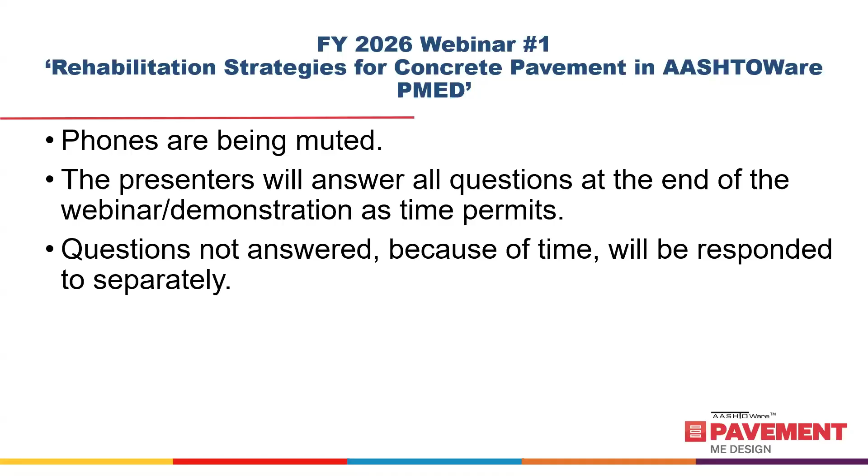Before we start the webinar itself, I do want to mention the prerequisite, which is having some prior experience with using the Pavement ME Design software, whether it's the desktop or the web version, for new concrete pavement design. There's a lot of things we will not be discussing because the assumption is that you have some familiarity with it, such as the traffic module, the climate module, and most of the material input data as well. The webinar will highlight areas where there are some differences as far as the user inputs go. But it's not that you won't get anything out of this if you don't have that experience, but it would help a lot to use that as the jumping off point for what we're going to talk about.

And with that, we'll talk about the learning outcomes. First, we're going to list the different rehabilitation options that are available for both jointed plain concrete and continuously reinforced concrete pavement.

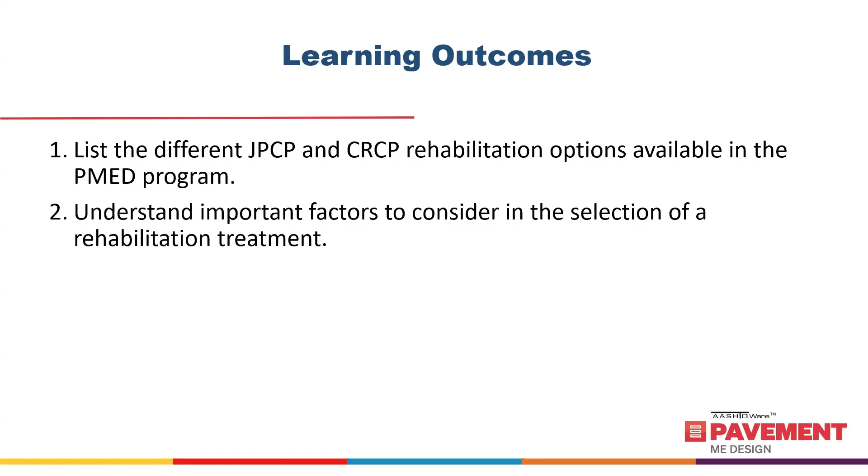We'll understand what factors go into considering the selection of the appropriate rehabilitation treatment, which is going to be tied back to the existing condition of your concrete pavement, essentially. And then we will talk about any differences in the material or design property inputs for rehabilitation versus new pavement design.

Sprinkled throughout the presentation, I'll bring up jointed reinforced concrete pavements, how those can be handled or maybe not handled with certain of the models. The reason it's good to mention this is because there's still a number of states that have a legacy of jointed reinforced concrete pavements, and the performance models were never calibrated specifically for jointed reinforced. It's always been either jointed plain or continuously reinforced concrete pavement.

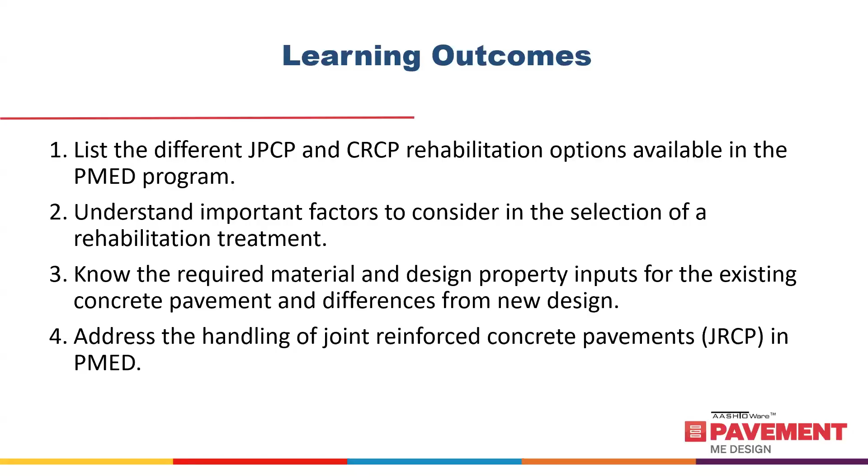However, when you're rehabilitating, especially if you're covering it, there are some ways that you can incorporate JRCP into the Pavement ME Design.

And the specific topics: we will go over the condition assessment, things that can be looked at for the current condition of a concrete pavement, and gauging the severity level. And then we'll get into basically the 5 different categories of models that are in Pavement ME Design.

Jointed plain restoration, which is only for jointed plain concrete - there's no CRCP restoration option. Bonded concrete overlays on either jointed plain or continuously reinforced. Asphalt overlays on either of the 2 pavement types. Unbonded concrete overlays on jointed plain or continuously reinforced, and asphalt overlay on fractured jointed plain or continuously reinforced. Several of these, 2 or 3 of these, have subtypes that we'll discuss, so there are more possibilities to select for some of these categories.

And finally, we'll summarize with some of the primary takeaways of the webinar. As a reference, the information provided can be tied back to certain chapters in the AASHTO MEPDG Manual of Practice. Specifically, Chapter 9 covers the pavement evaluation for rehabilitation design, which would be your condition assessment of the pavement. Chapter 12.2 covers rehabilitation design with asphalt overlays, and Chapter 12.3 covers rehabilitation design with concrete overlays.

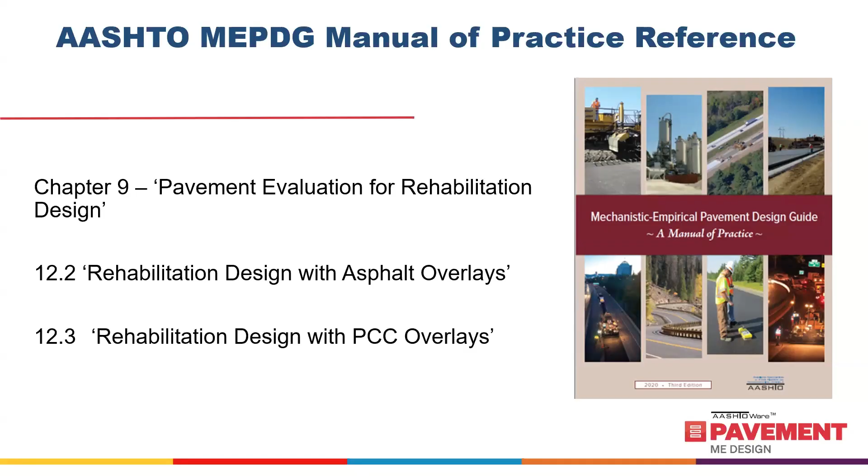Okay, starting with the first item, condition assessment of rigid pavement.

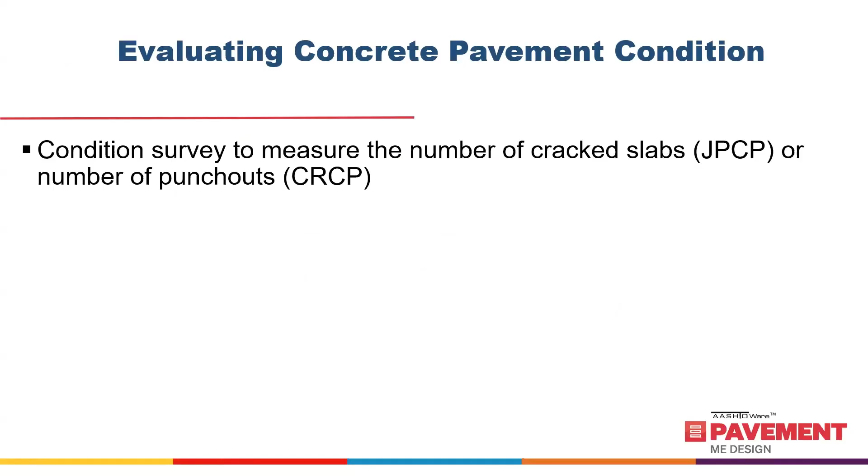The things you can do: one is a condition survey to measure the number of cracked slabs in jointed plain concrete pavement, or the number of punch-outs per mile for CRCP.

You can back-calculate information for jointed plain concrete pavement. If you can back-calculate the concrete elastic modulus, then use the correction factor to get the static value, which is what you would input in Pavement ME Design.

You could also back-calculate the resilient modulus values of the lower, unbound layers, or you can just go straight to calculating what the dynamic K value is. The K value is used for the foundation support engineering property in the analyses. You'll have an option to do a conversion from the lower estimated resilient moduli to get the K value, or you can input it directly if you wish.

Load transfer efficiency of transverse joints and cracks is important because it will be used as a design property in helping to estimate the amount of reflective cracking that's going to occur through asphalt overlays.

Void detection at corners is primarily to figure out if you have to do repairs—you're going to have to restore the concrete pavement to some extent in order to do some of these rehabilitation treatments. So you're going to have some type of minimum performance level. The FWD does a pretty good job of this; there's a method for estimating voids using the relationship between the load and deflection.

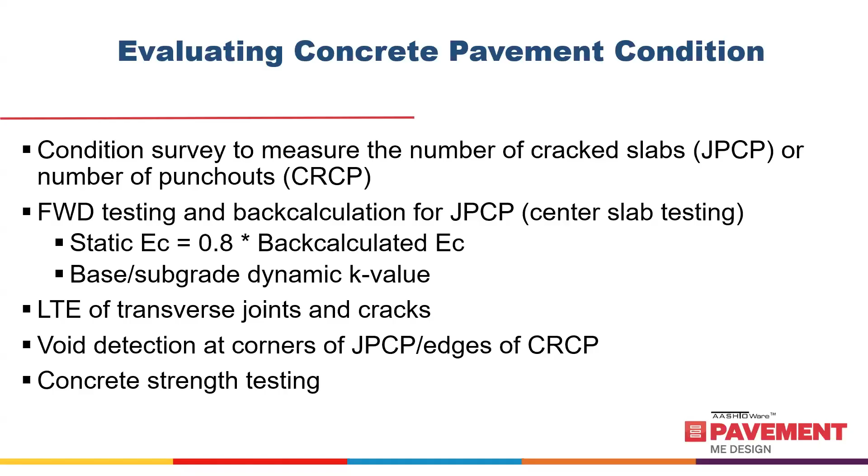There is a table in the manual of practice that helps you gauge the serviceability level of the pavement you're evaluating. It covers jointed plain and CRCP, but also has a few entries for jointed reinforced concrete pavement. So if you're covering up JRCP pavement, you can use this criteria to help determine what some of the design property inputs are going to be.

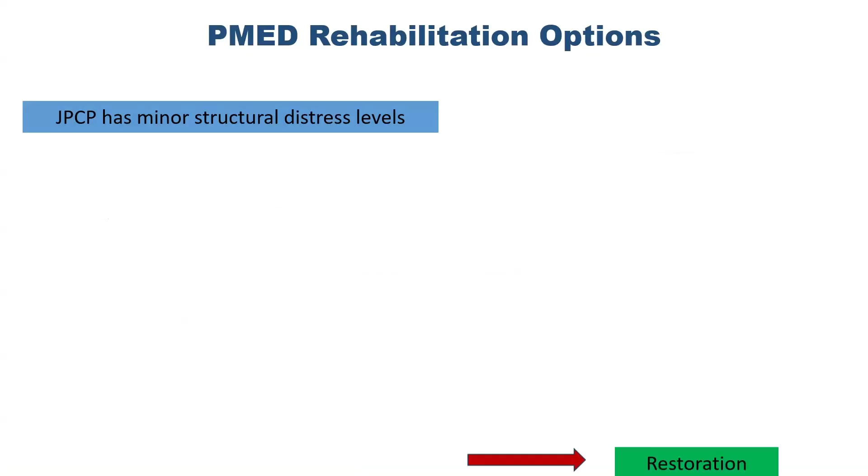So what are our options? If the jointed plain concrete pavement has minor structural distress levels, that can be a good candidate for restoration using the restoration module. If you have minor structural distress levels but may need additional structure, a bonded concrete overlay is a possibility—well, maybe not a strong possibility. We'll get into that when we cover this.

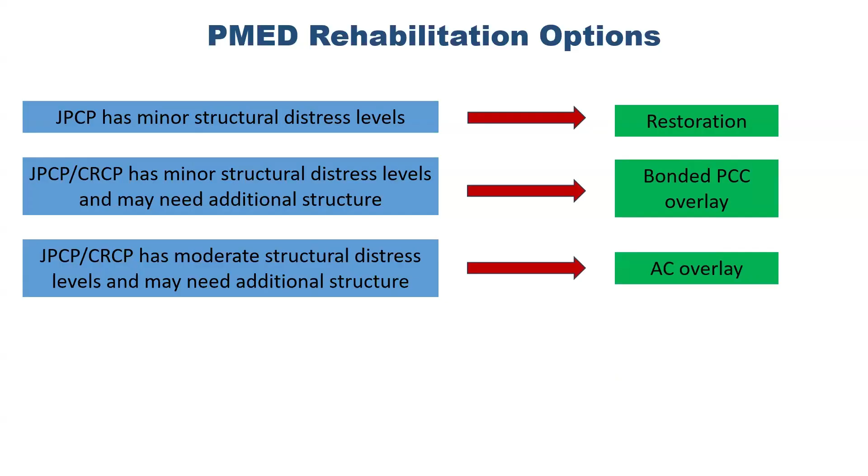If it has moderate structural distress and may need additional structure, that might be the sweet spot for considering an asphalt overlay. If you have moderate to major structural distress levels in either type, at that point you may have to go to an unbonded concrete overlay.

And finally, if you just have major structural distress levels that would cause you to distrust any of the overlay options, then you can look at fracturing the concrete and placing an asphalt overlay on it. So these 5 rehabilitation treatments are all represented in performance models in the Pavement ME Design program.

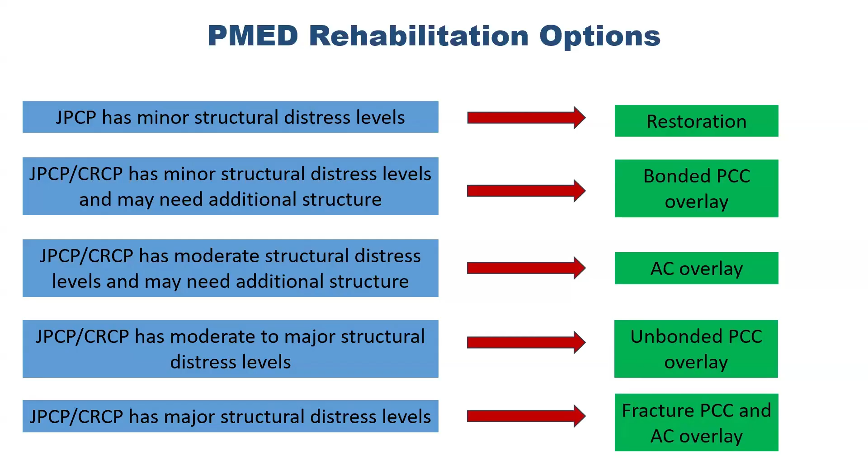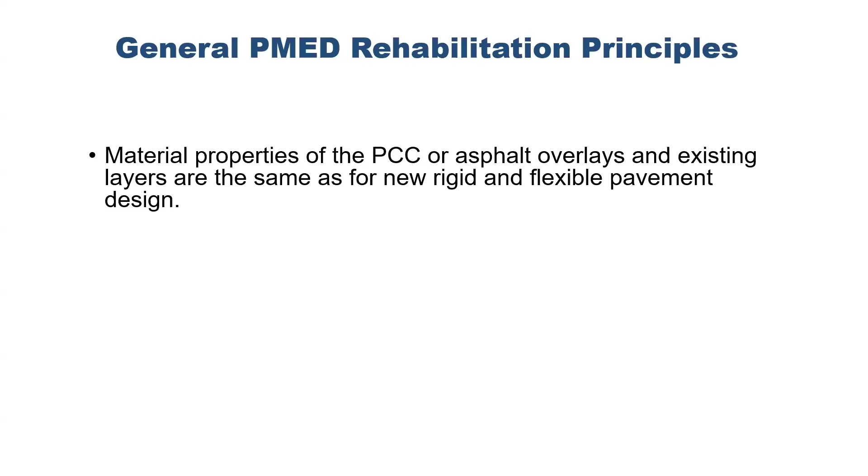So some guiding principles cover pretty much all the types of rehabilitation strategies we have here. Keep these in mind: the material properties of the concrete or asphalt overlays and existing layers are the same as for new rigid and flexible pavement design. So we're not really changing anything there.

The models and transfer functions are also the same as for new pavement design, except that if you are placing an asphalt overlay on the concrete pavement, then you're also going to include the reflection cracking model as well in the estimate of primarily the total transverse cracking.

Okay, let's get into some of the specific treatments here. JPCP restoration—this is just showing you a screenshot when you initiate the project. You're going to be selecting the design type. From the drop-down menu, you can select restoration. For pavement type, there's only one to select, which is jointed plain concrete restoration. As I said, that option isn't there for CRCP.

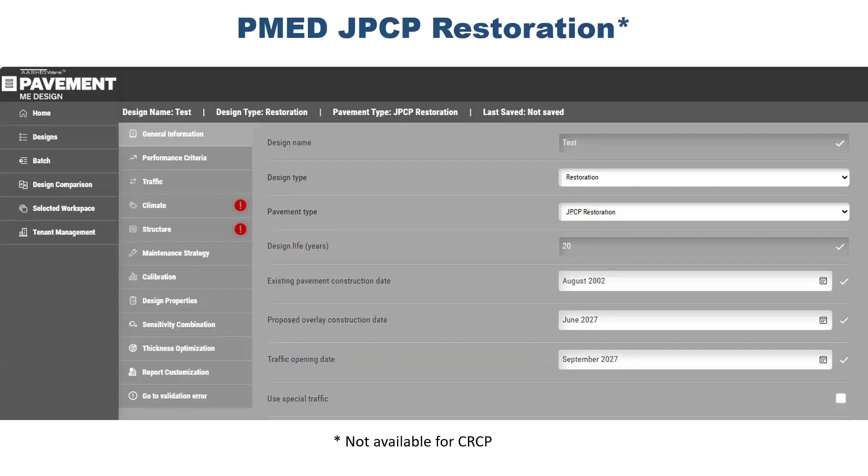So what kind of pavement would we select for doing restoration? No significant cracking. Obviously, you can address cracking through full depth repair as much as you want, but from a cost effectiveness standpoint, it's probably not a wise choice.

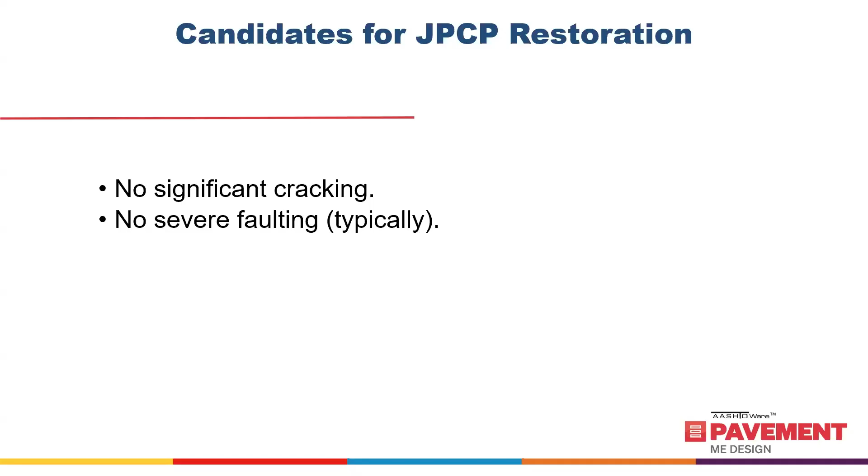At that point, you'd be better off doing one of the more heavier duty rehabilitation treatments. No severe faulting typically. I say typically because you could have a situation where the original concrete pavement did not have dowel bars, and so you might have had somewhat significant faulting occurring because of that. However, the subgrade itself is still in pretty stable condition. So really, if you do dowel bar retrofitting and then diamond grind the surface, that could still be a good candidate for restoration if you don't think loss of subgrade support is going to haunt you in the future.

So that's why I say generally severe faulting would be an issue, but you have to evaluate the foundation condition. No significant durability problems—in other words, no concrete cancer, D-cracking, alkali silica reaction, some of the other nasty things that can happen to concrete. Once it starts, it's going to continue. And really, at that point, if you want to retain the concrete pavement in some manner in the structure, covering it up is probably the best thing you can do because that will slow down or inhibit the infiltration of chlorides and other nasty things that get into it through water or precipitation.

And you can slow down the deterioration in the concrete pavement and get more life out of it. No significant subgrade pumping—I kind of alluded to this with the cracking issue. So if you have pumping going on, you have to do something, either through a combination of retrofitting, undersealing, slab replacement, maybe even undercutting and putting some select fill in areas. But that definitely is not a restoration candidate if that's happening.

And as far as JRCPs go, no, you cannot do restoration modeling in Pavement ME Design with a jointed reinforced concrete pavement, because it's not being buried where its properties become less significant. You're still stuck with that as your final product, and the model simply wasn't calibrated for the longer joint spacing and mesh reinforcement.

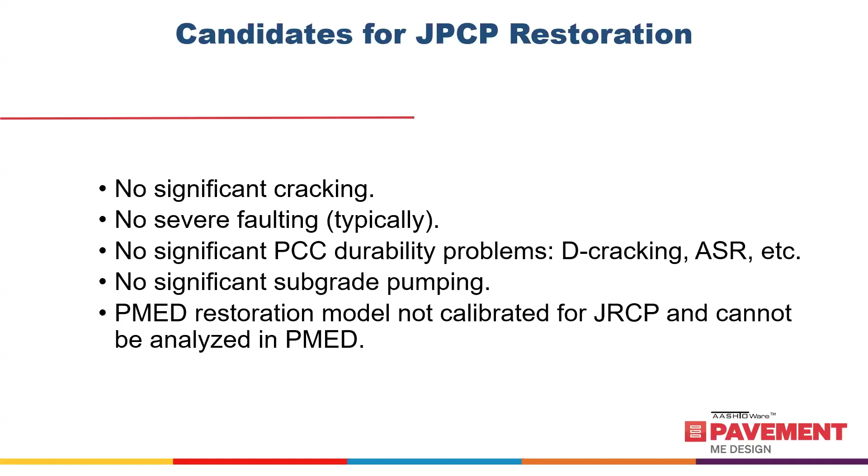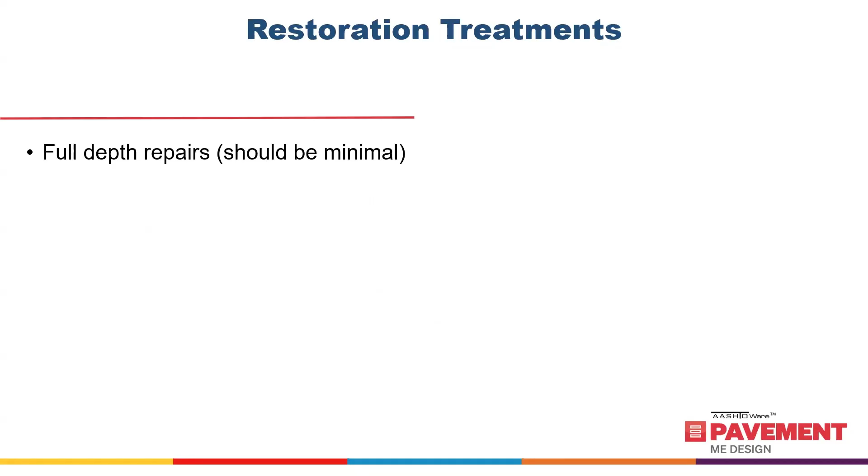So as far as treatments, what would you do prior to running the design? Full depth repairs. Again, if you want to be cost effective, if you run over some theoretical percentage of full depth repairs that are required, at that point you should be looking at some other rehabilitation strategy.

And partial depth repairs. Now there may be more of these. They're in spot locations generally, and if whoever's doing the partial depth repairs does it according to proper procedure, which is another topic in itself, they should be long-term fixes. So they're a good solution when done right.

Dowel bar retrofitting, especially if you don't have dowel bars at the joints right now, should always be strongly encouraged. Cross stitching—this is a lesser known treatment, but it's used in situations where you have some uncontrolled longitudinal cracks. They might not have opened up yet, but the potential is there in the future. And if it opens up a little bit and you have a little bit of settlement, you could have faulting longitudinally. So cross stitching isn't really meant to solve loss of load transfer so much as to keep slabs together so they don't walk away.

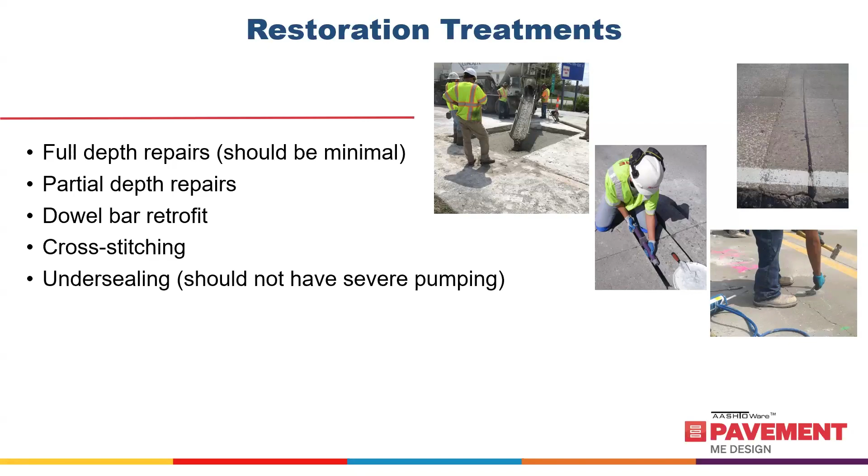But keeping the crack tight provides you aggregate interlock, so it does help with load transfer as well. And undersealing—again, it shouldn't be used to solve severe pumping problems. It'll definitely help, but it's more so when you detect a void through FWD testing, just to try to prevent that from being a problem in the future.

And finally, diamond grinding, which is kind of icing on the cake. This is where you really hit the reset button. You've done all your other restoration treatments, and finally you grind the surface, and you're back at, hopefully, at least whatever the IRI was at the date of construction, if not better than that. And generally it should be better than what it was constructed at.

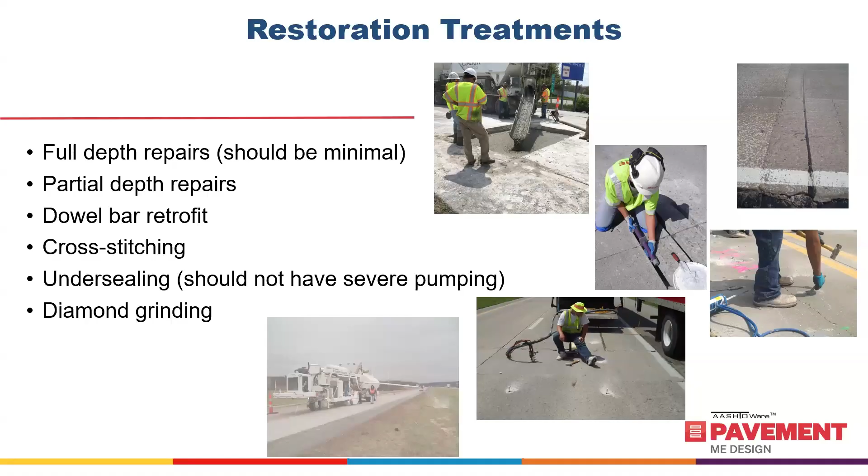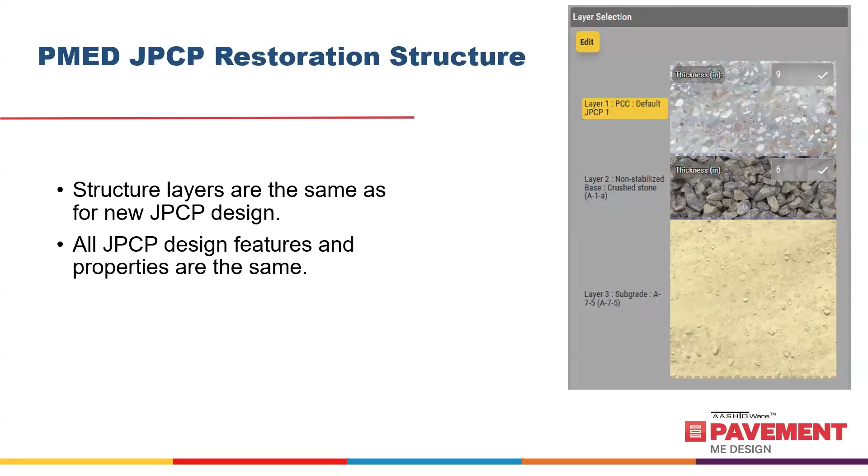As far as the structure, when you do the layer selection, it's the same as a new pavement. You're not adding any layers to it or any overlay. So it's your concrete pavement—all the design features and properties are the same. The performance criteria is the same as for a new jointed plain concrete pavement.

Now your IRI that you're setting, the initial IRI, again take into account the restoration treatments you did to it. So if you do a bunch of patching and you don't grind it, it's probably going to be a little worse ride-wise, unless the contractor did an excellent job of finishing the repairs. But generally that's kind of hard to do. You're better off, again, grinding the final surface. And then here you would estimate whatever that number is going to be as your initial IRI for performance criteria.

Now, the elastic modulus of the existing slab must be compatible with flexural strength. What that really means is the relationship between modulus and flexural strength should be kind of in lockstep along the maturity curve you'd normally see for both properties. The problem is if your flexural strength is too high relative to elastic modulus, your fatigue cracking could go to almost nothing. The reverse is if your modulus is too high with respect to the modulus of rupture, you could have a much higher quantity of cracking than should actually occur.

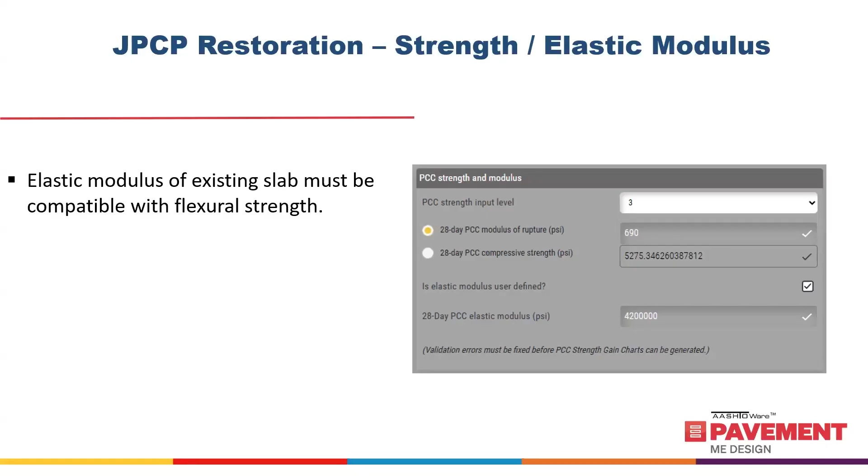And if you are back calculating, as I mentioned, you multiply the dynamic value by 0.8 to convert to a static value for elastic modulus of the concrete. Then you backcast that static value to the 28-day elastic modulus, so it's compatible with whatever your estimate of the 28-day flexural strength is.

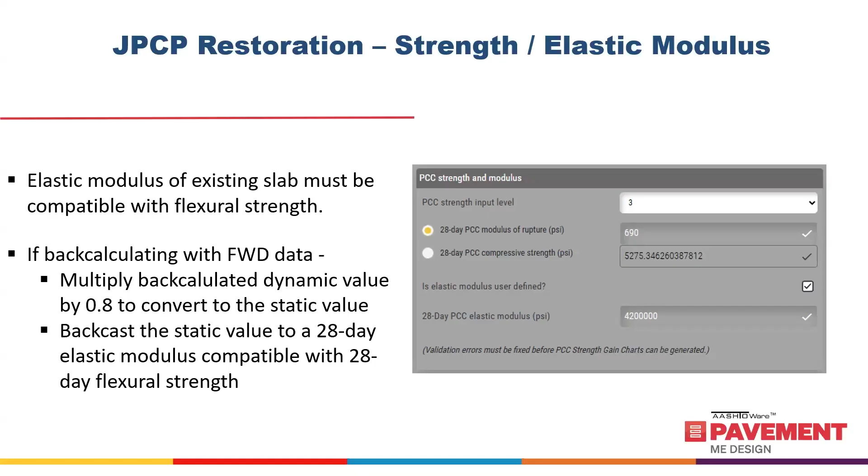Now, for the lower levels, the unbound layers below the concrete pavement, a couple things you can do. One is if you are back calculating the elastic moduli of each layer and input those, you can let the program estimate the dynamic modulus of subgrade reaction. If you don't, you could also input it directly, if you've estimated or calculated it from your FWD data, and that overrides whatever resilient modulus data was there for the unbound layers below. So ultimately, the actual engineering property input used in the analysis is the modulus of subgrade reaction, or your K value.

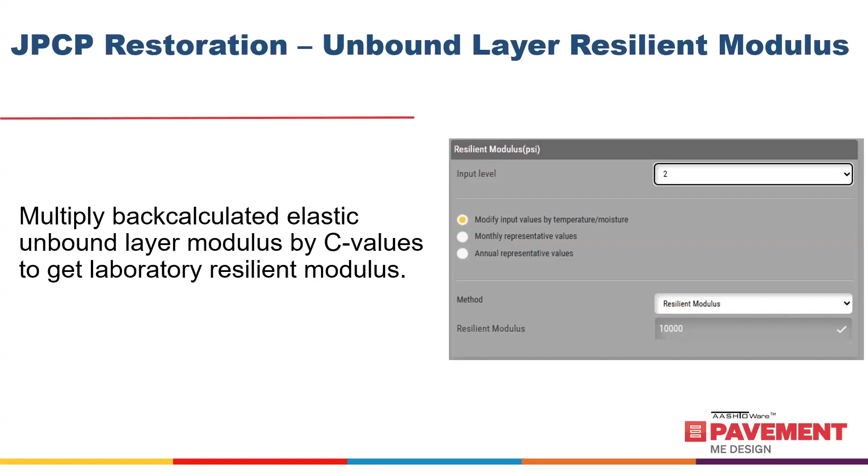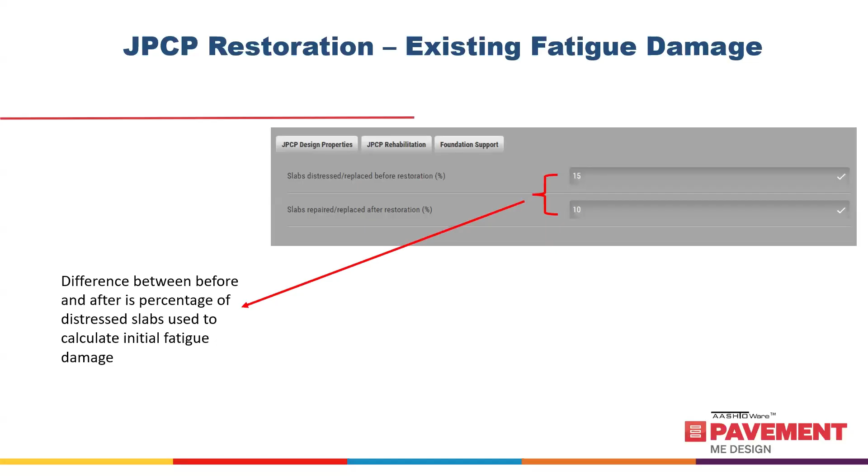I mentioned this already, the fact that if you want to let the Pavement ME Design program calculate the unbound layer modulus of subgrade reaction from the resilient modulus values, just leave the box unchecked. You check it if you're going to input it yourself.

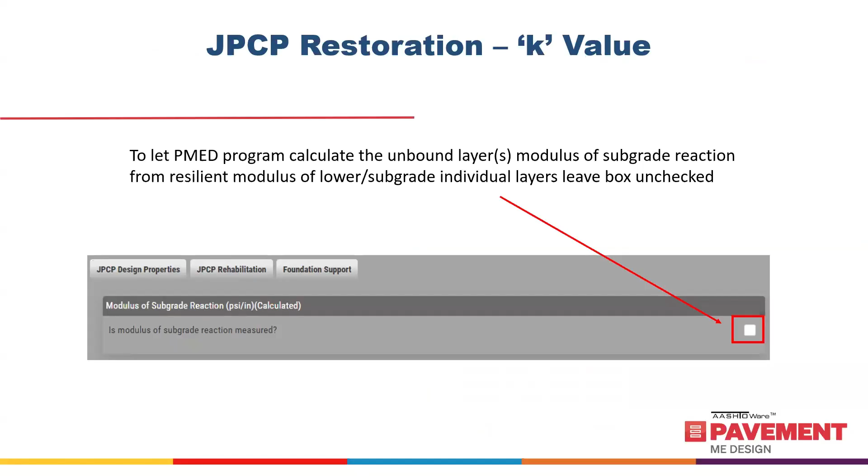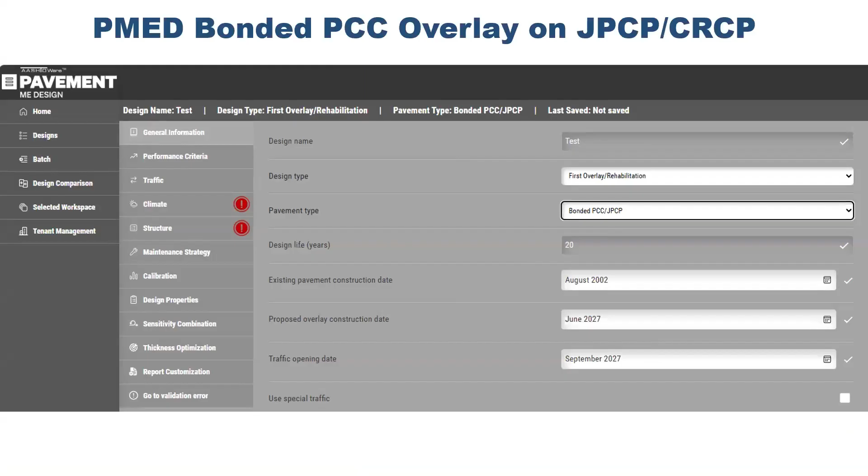Okay, bonded concrete overlays on jointed plain concrete pavement and CRCP. Here again, this is the opening screenshot. In this case, for pavement design type, you're going to select overlay rehabilitation, then pavement type, bonded PCC over JPCP, or there's also bonded PCC over CRCP.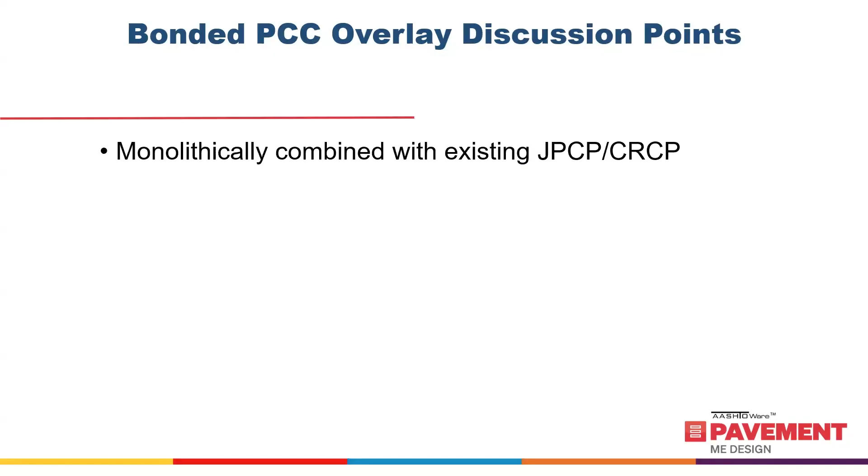Two types. So what's going on? With the bonded concrete overlay, you're essentially creating a monolithic structure between the old and the new concrete. It is the least common pavement treatment, and probably for good reason.

These models were all globally calibrated primarily with long-term pavement performance information, data derived from experiments going back over 30 years ago that were set up to have a statistically representative number of sections to look at. In the case of bonded concrete overlays on concrete, there weren't enough sections. Nationally, there were only 4 sites. So instead of being a full-fledged experiment, it was the SPS7 experiment, basically reduced to a case study situation. So from the beginning, there really weren't a lot of pavements to use for the calibration.

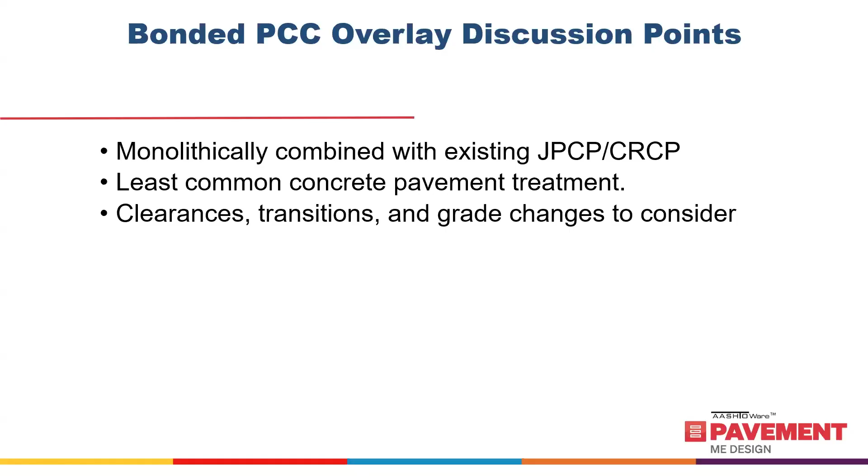Now, why don't people do this? Because there's a lot of difficulty in trying to get it right. As with any overlay strategy involving a grade increase or profile increase, you have to consider clearances at bridges, transitions to bridge approaches, and any grade changes in general as it affects guardrail, slopes, and other roadway features. So always have that in mind.

So this is very high risk, high reward, because there's two things for jointed plain concrete pavement. You have to really prepare the surface well to ensure bond. From personal experience being involved in scoping these projects, and being there in the field as they were being constructed, it takes a lot of quality control to really make sure the amount of sandblasting and shot blasting is appropriate.

It helps to do pull-off tests on the surface just to make sure that good bond is available. This is kind of done all the time on bridge decks, but bridge decks are a smaller area that you can focus attention on more strongly. In the case of a pavement, it's a much broader surface area, and it's difficult to maintain the level of quality control you need to make sure the surface is prepped.

The second issue is joints. Not for CRCP - because the cracks are tight, you can basically just pave right over it. I don't have personal experience with concrete overlays on CRCP, but the theory is that you really shouldn't have uncontrolled cracking resulting from the CRCP cracks.

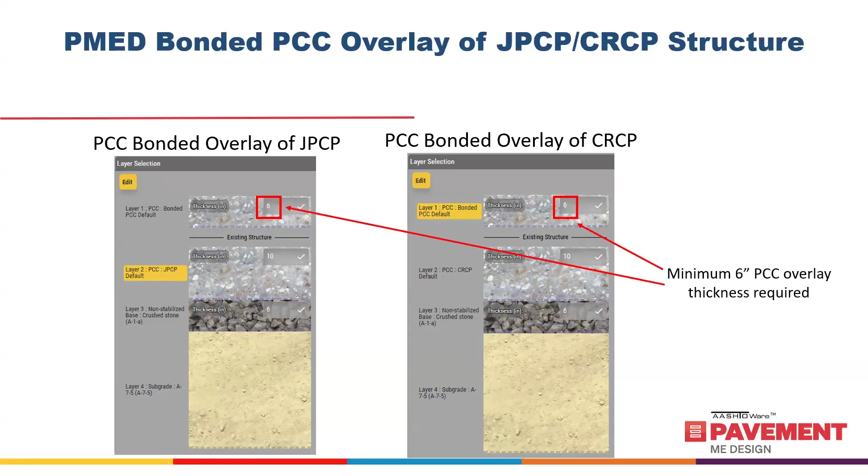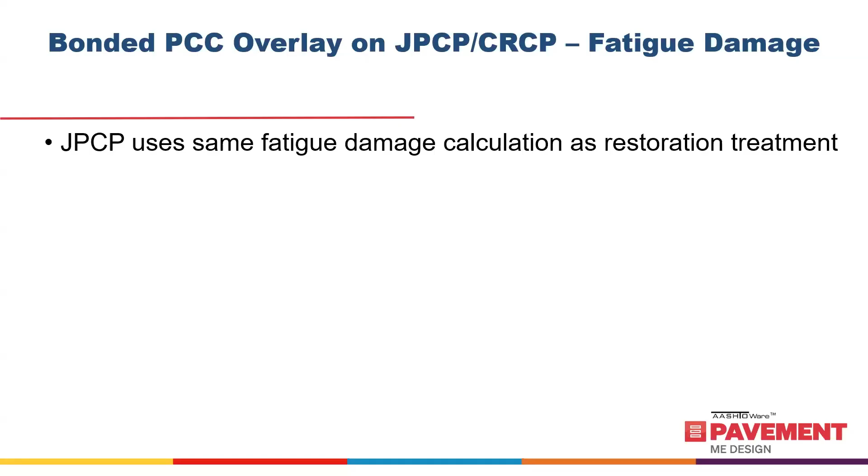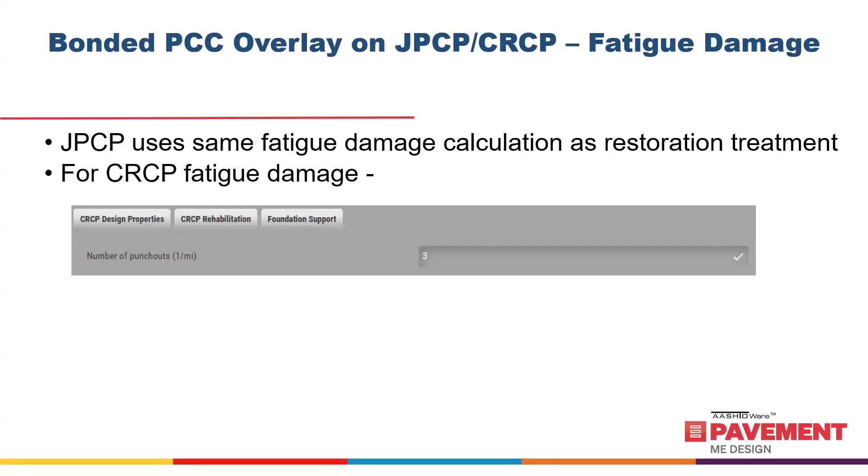As far as the fatigue damage, you're using the same fatigue damage calculations as restoration. For CRCP, you're not doing a difference between before and after slabs - you're basically assessing it from the number of punch outs, and this is actually the correct graph.

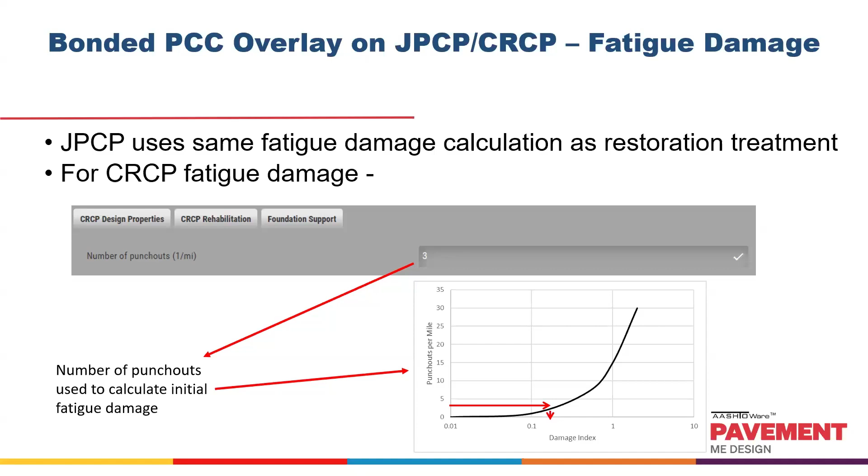I apologize about the previous one, but this is the punch outs per mile versus damage index. In this particular example, we have three punch outs per mile, and you relate that to the damage index, and that's your starting point. So in the analysis, your existing concrete is at that fatigue level, and the fatigue damage that accumulates after that point is basically assessed from that starting point.

And kind of the same thing, your common thread you're going to see is, if you're doing back calculated unbound layers, multiply those by the C values to get the laboratory resilient modulus, or if you just want to input, you can use that then to calculate the modulus of subgrade reaction. But again, you do have the choice of checking that box for that table or for that entry in design properties, and inputting your own K value.

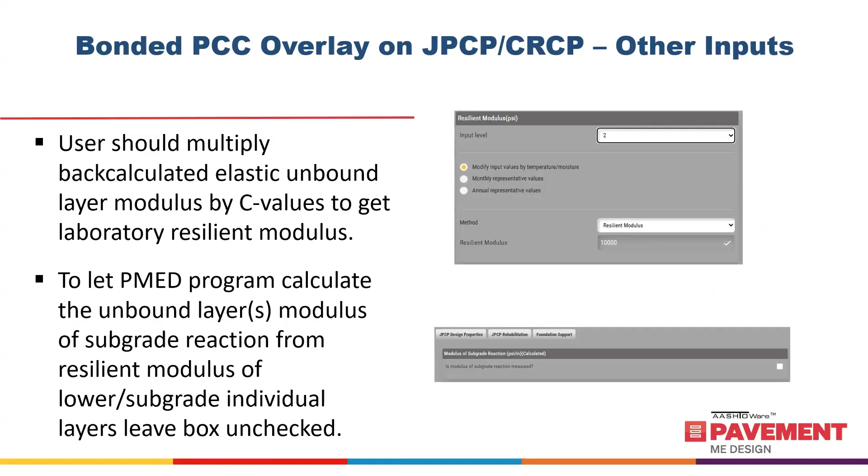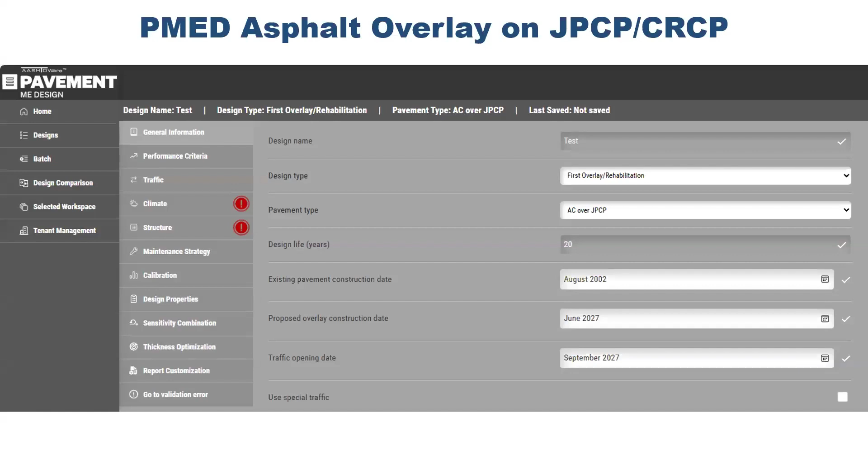Okay, next topic is going to be asphalt overlays on jointed plain concrete and CRCP. Initial screenshot again, you're selecting first overlay rehabilitation, and pavement type is going to be either AC over JPCP or AC over CRCP.

So again, what kind of pavement are we going to be placing asphalt overlays on? It should be in halfway decent shape. Asphalt will cover some issues, but not all. And if you do have some severely cracked slabs, then you should do full depth repairs.

Partial depth repairs aren't as essential. You could obviously fill those with asphalt or patch them with asphalt as you're going over typically, but if you want to restore the surface to its original condition as much as possible before doing an overlay, you can do a partial depth repair with some type of cementitious material.

Dowel bar retrofitting, definitely if you do have load transfer problems, those would reflect it either quickly or maybe delayed to some extent, depending on the thickness of the asphalt overlay. But it's still going to be a problem, and you really want to make sure that you have good load transfer across joints and cracks.

Under sealing, kind of for the same reason. You want to prevent movement of the slabs because those can reflect through fairly quickly.

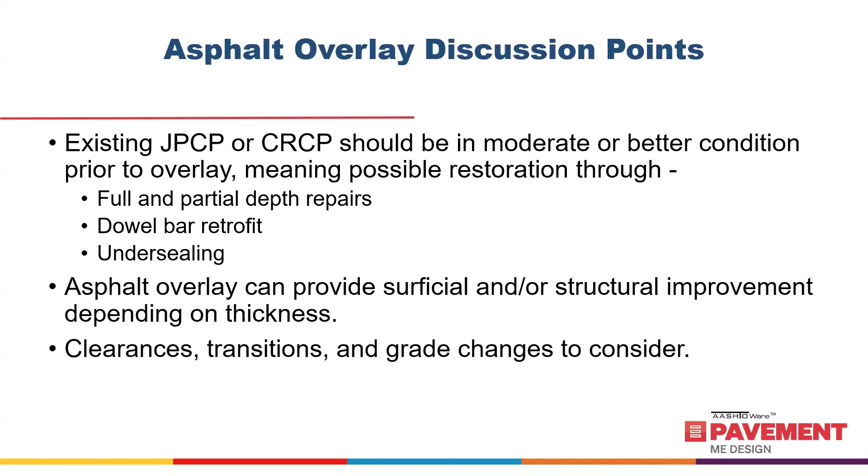And the overlay itself, again, is either going to provide, you can always correct surface conditions. So you can restore ride, you can cover up low to moderate faulting, and depending on the thickness of the overlay, you may actually be adding real structure to the pavement, which would now be a composite pavement structure. As always, take clearances, transitions to bridges or structures, and grade changes into account.

So thin overlays, you are restoring ride, but you're not adding significant structure, and you will get reflective cracking through probably within the first couple of years at joints. And if you do have working cracks, by working cracks I mean a crack that's opened up enough to where the aggregate interlock isn't working anymore.

It's not providing you load transfer, and you really don't have any. If it's plain concrete, you're not going to have any load transfer steel across there either. So sometimes your working cracks are going to be worse than your joints. So just something to keep in account. And again, you can address this through doing a full depth repair, so you're not going to have these cracks as an issue.

For the thicker asphalt overlays, again, you're still restoring ride, and you are adding structural capacity, and you are slowing down the rate of reflective cracking. But from my experience, no matter how thick the overlay is, it could take a while, but eventually you are going to see some reflection through there at some point.

But there's ways of mitigating it through the asphalt mix selection, especially if you're doing some specialty mixes, high mod with polymers or SMAs. Again, from experience, I've noticed that SMAs don't necessarily prevent a reflective crack from showing through, but it does lessen the severity of the crack. So some of these surface mixes are effective at mitigating either the amount or the severity of reflective cracks.

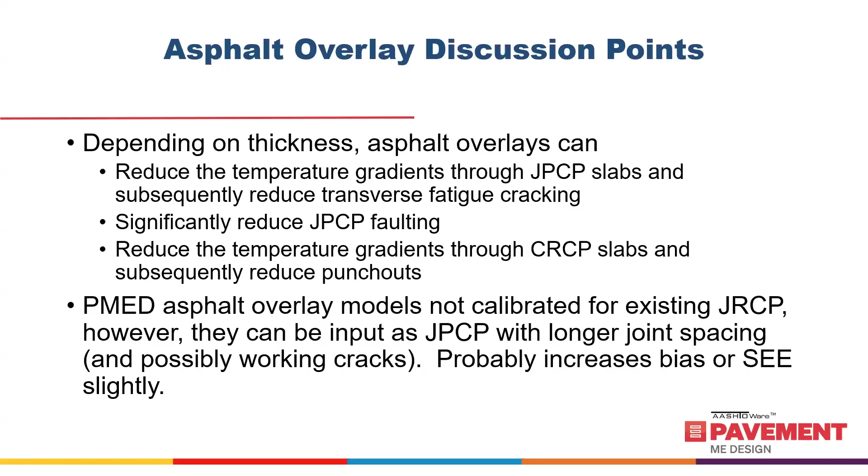Is that completely correct? No, it's not. You may have a little bias or increased standard error by using a jointed reinforced concrete pavement in place of jointed plain. I don't think it's going to be much though, so I'd feel pretty comfortable doing this.

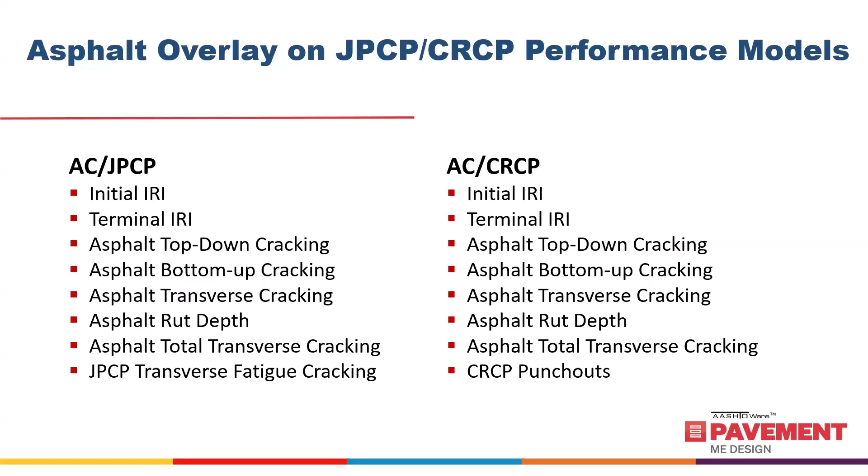Asphalt transverse cracking is primarily going to be thermal cracking in the wearing surface mix. You also have rut depth, and then total transverse cracking when you combine it with reflective cracks from the jointed plain concrete below. Similarly for CRCP, all the same asphalt models apply, and your CRCP punch outs will also continue. So there's a continuance of the fatigue damage predictions for both jointed plain and continuously reinforced concrete pavements.

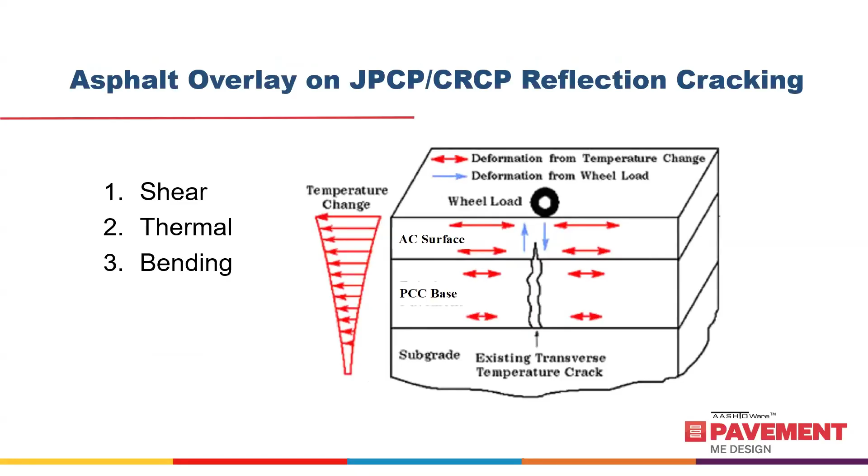Looking at the actual reflection cracking mechanisms for an asphalt overlay on either jointed plain or CRCP, you have a combination of shear, thermal, and bending. Shear and bending are load related. Thermal is contraction or expansion occurring from temperature changes.

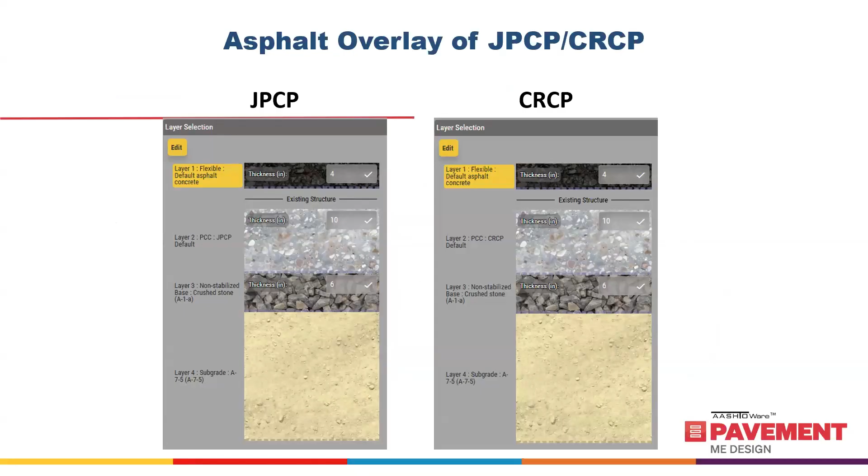And the structure diagrams for jointed plain and CRCP with asphalt overlays - these are the screenshots for both.

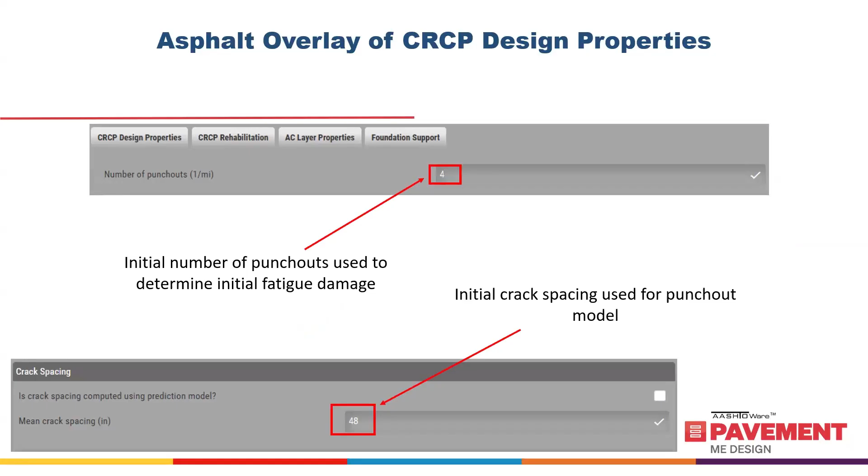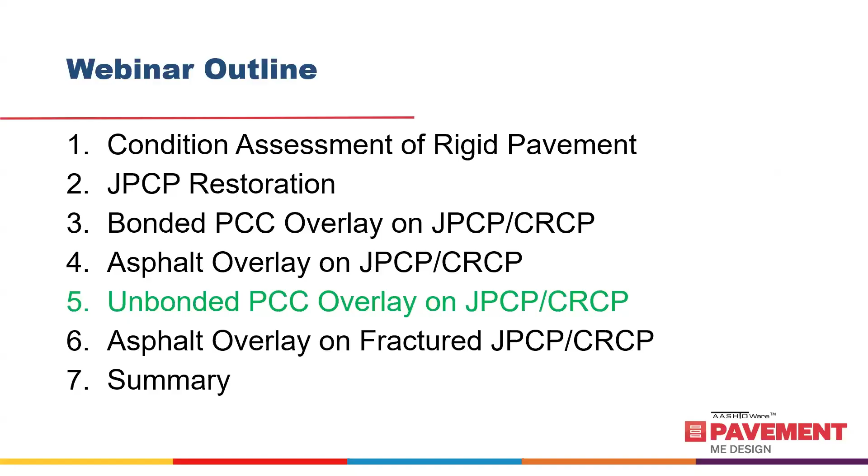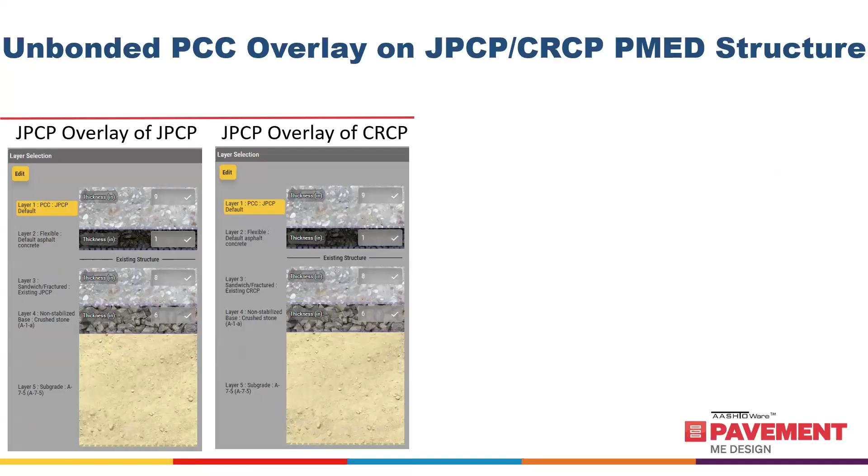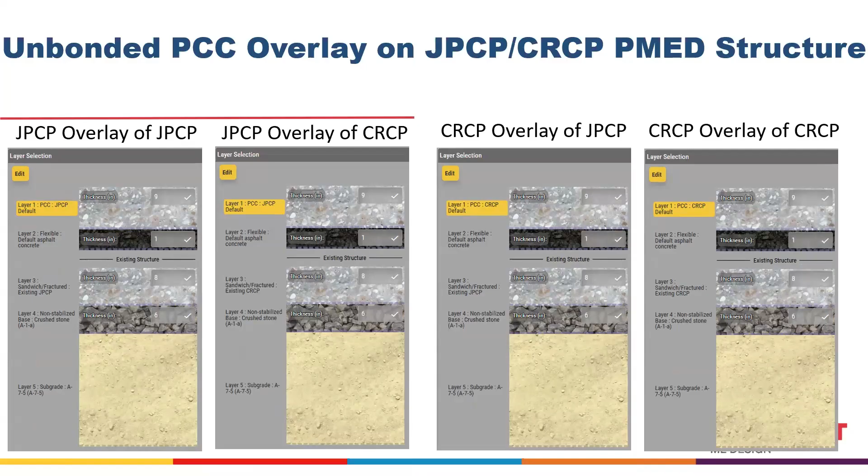Going through them, you can have jointed plain overlay on jointed plain pavement, jointed plain overlay on continuously reinforced pavement, continuously reinforced overlay on jointed plain, and CRCP over CRCP. In each of these cases, you're going to have an interlayer which serves as your debonding medium to prevent bond between the old and new concrete. The performance criteria for unbonded jointed plain or continuously reinforced overlays are going to be the same as their respective new jointed plain or CRCP models, as you can see here for both.

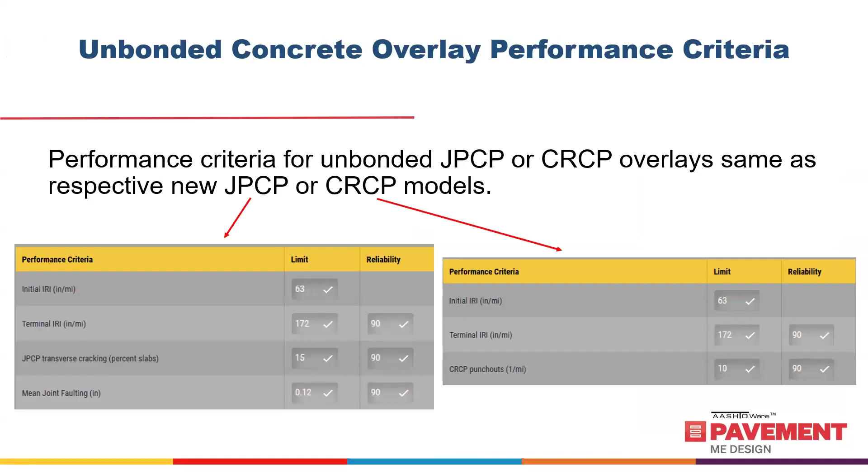Okay, so let's talk a little bit about these overlays. You can place them on severely distressed jointed plain or continuously reinforced concrete pavement. The caveat is if you have a serious pumping problem, that may really test the limits of the concrete overlays. It's still prudent to either undercut, replace, or underseal, and sometimes even jack the slabs a little to restore the original profile before placing the overlay. An occasional spot you can live with, but continuous pumping problems should really be addressed first, regardless of what strategy you're doing.

Reflective cracking is not an issue with unbonded concrete overlays, because you're more or less designing this as a new pavement on top of a pretty stiff foundation, so you're not anticipating reflection cracking. I've been around a lot of unbonded concrete overlays in my previous career, and generally that isn't one of the things that afflicted them.

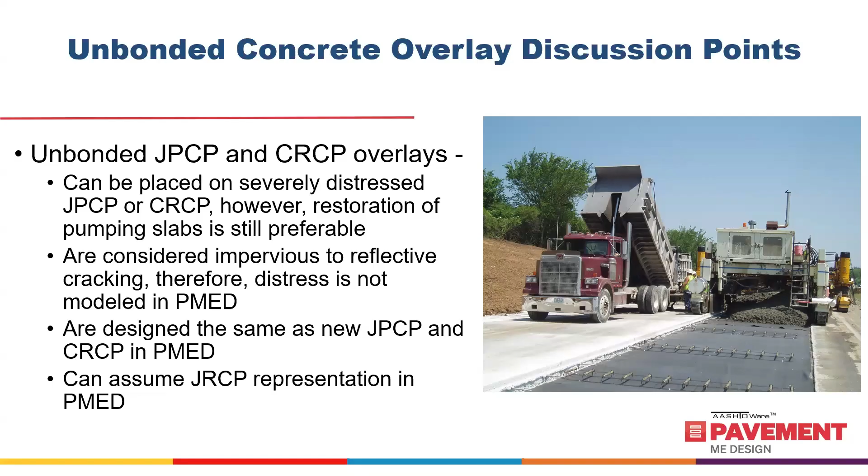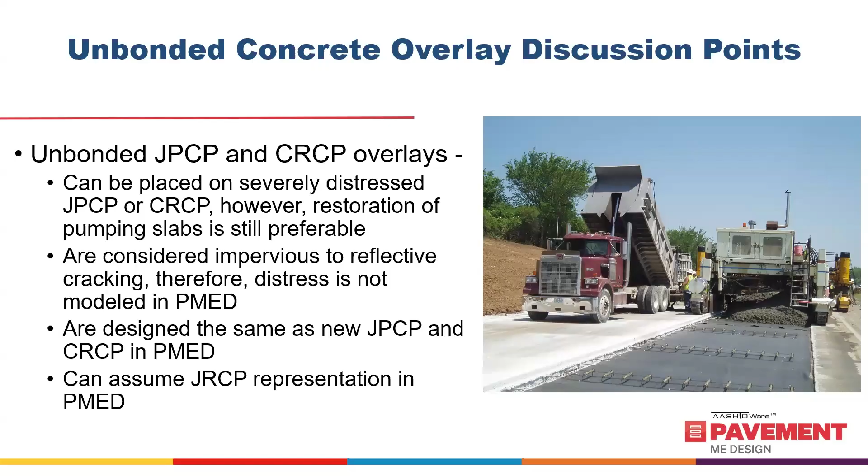As I said, you're basically designing an unbonded jointed plain overlay and a continuously reinforced overlay pretty much the same as you would a new jointed plain or CRCP pavement. It's pretty safe to run the model if your base concrete pavement is jointed reinforced, because all you have to do is apply an engineering property for the foundation support, and your crack spacing or joint spacing is really irrelevant. So an unbonded concrete overlay is probably about the safest strategy to incorporate an old jointed reinforced concrete pavement.

Yeah, so all you're doing is just having to estimate whatever the K value is. So if it's jointed plain, CRCP, or even jointed reinforced concrete, it's just a simple foundation.

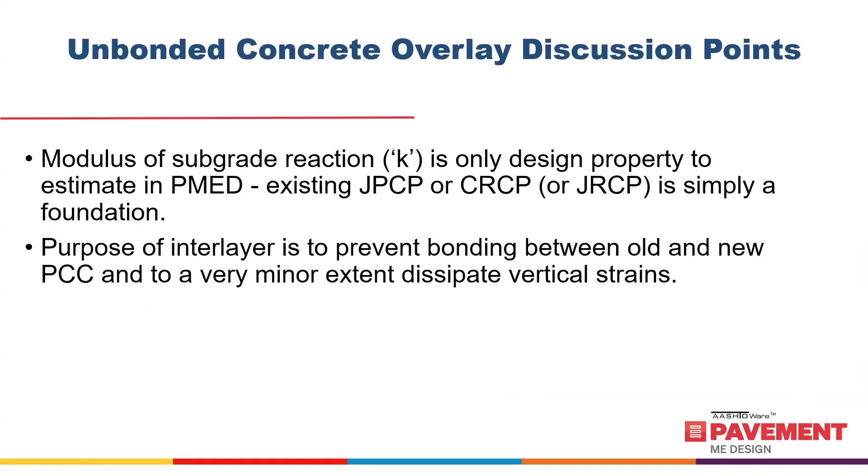Now, the interlayer's main purpose is to prevent bonding between old and new concrete. It can somewhat dissipate vertical strains, but for a thick overlay that's not really that important. If it was a thinner, say a bonded concrete overlay, with thickness of only 3 or 4 inches, that may be something to consider. But it's really just a side benefit - the primary purpose of the interlayer is just to make sure the concrete isn't sticking together.

Right now, the Pavement ME Design program can only model asphalt interlayers, generally because when the models were developed, the concept of using geotextile interlayers, which is very common nowadays, didn't exist. So I wouldn't tell somebody that you couldn't model it in the program. If you're using a geotextile interlayer, I would simply say use a 1-inch asphalt layer to represent it. Is that totally correct? No, that's not, but it's a good workaround method until we devise a better way of modeling geotextile in the program.

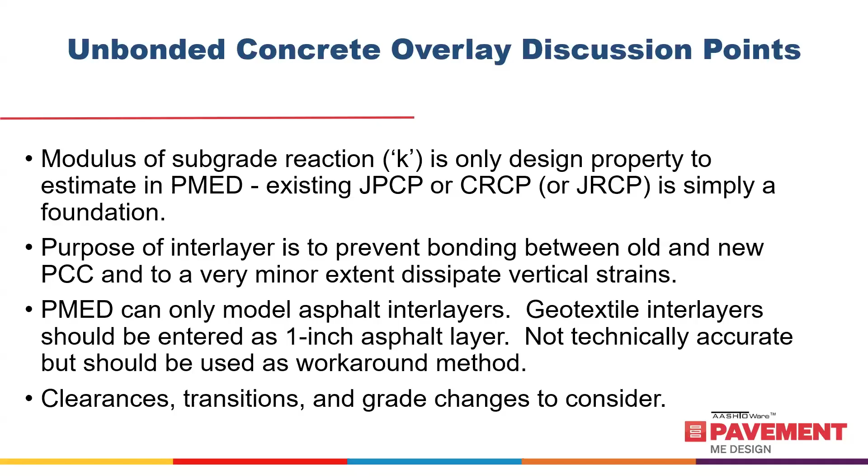So that should be taken into account, and also look at what it's doing to the adjacent features too. A lot of times guardrail does have to be replaced, especially as you're updating it to meet current MASH standards, but if it's already been replaced recently, you don't want to have to reset that. So that's something to take into account - what are you inconveniencing with your overlay design? Outside of just focusing on the pavement itself, what else is going on around you? So always encourage people to look at the big picture.

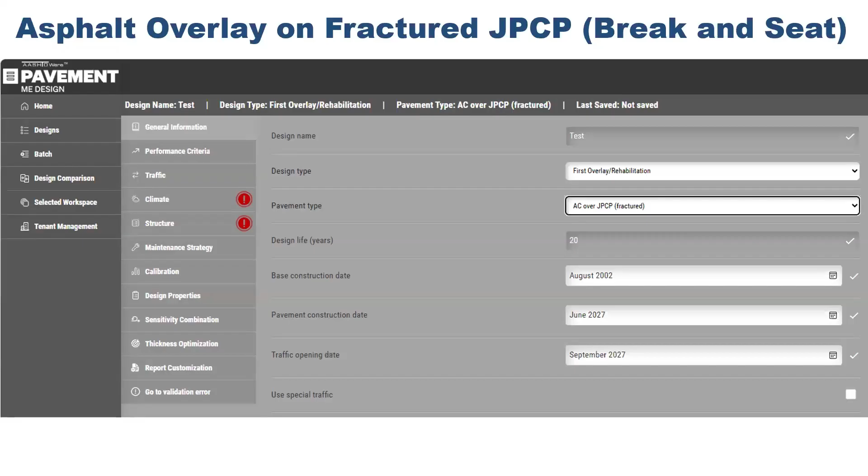Okay, our last category we're going to look at is an asphalt overlay on fractured jointed plain or jointed reinforced concrete. We always start with the opening screenshot here. So you select first overlay rehabilitation, and this is the case where if you're doing essentially a break and seat treatment, you select first overlay rehabilitation and AC over JPCP. However, if you're planning on rubblizing the concrete, then use a different design type - you select recycling, and there's a pavement type for AC over rubblized PCC. So we'll talk about each of these possibilities.

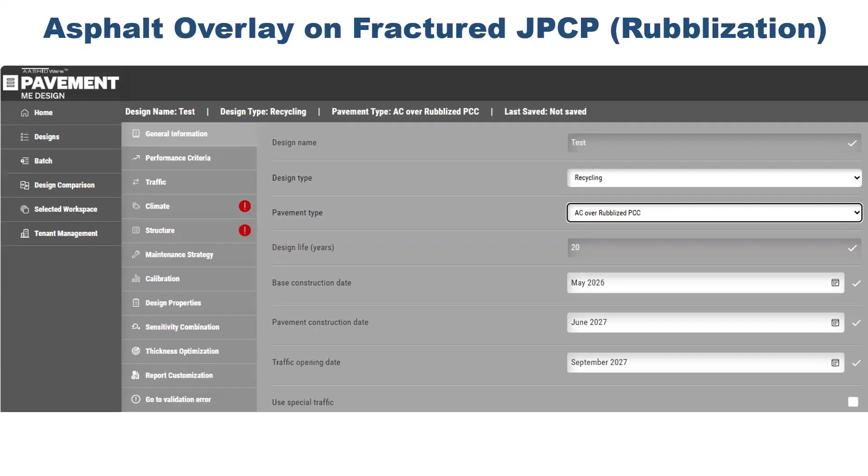Fracturing can either be break and seat or crack and seat. Sometimes these terms are used interchangeably, but there's supposed to be some nuance in the difference. Break and seat is more geared towards jointed plain pavement, where you don't have any continuous reinforcement. Crack and seat is better suited for jointed reinforced concrete pavement, where you're trying to sever the mesh reinforcement and make sure you have separation at all of your cracks. But here, assuming primarily that we're dealing with rehabilitating jointed plain concrete pavement, we'll just call it the break and seat method.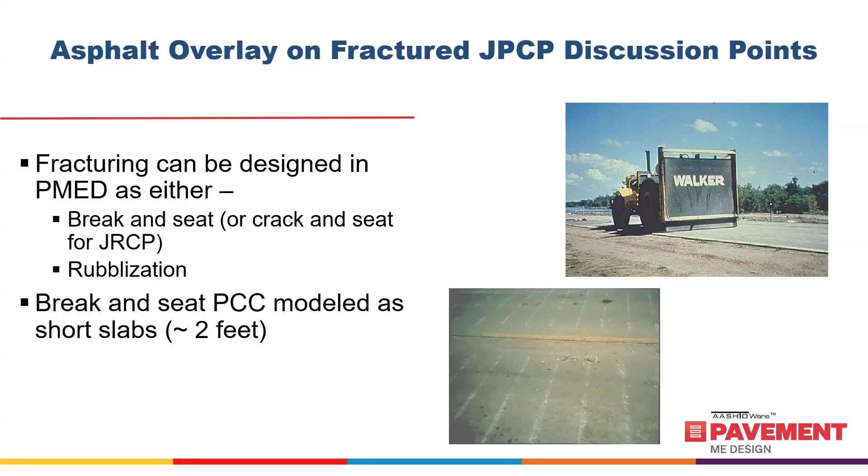And then rubblization. For break and seat, the equipment itself is kind of like a guillotine, and you're dropping this hammer across the entire pavement width, which could vary anywhere from 1 to 3 feet, but on average these cracks are going to be about 2 feet apart from each other. I know there has been an issue where the drop hammer force isn't high enough, so sometimes you may see like a chalk line across there, but the pavement isn't actually cracked. So you want to make sure you're getting a positive fracture throughout the whole slab.

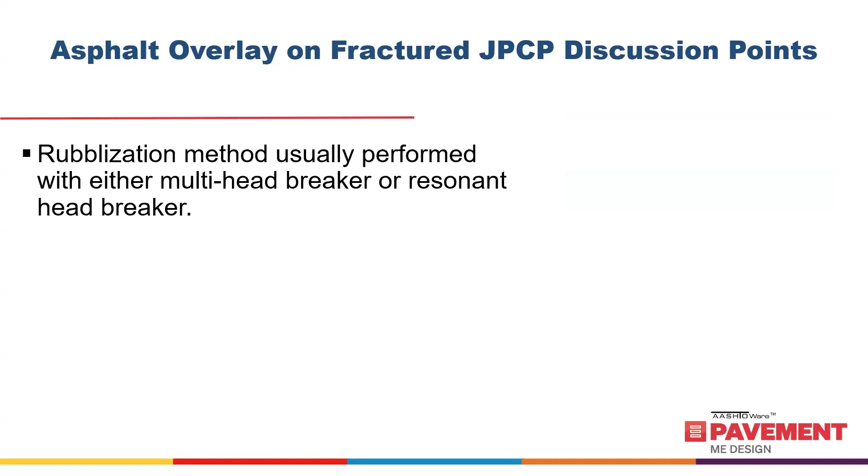For rubblization, there's 2 primary pieces of equipment nationally that are used to do this: the multi-head breaker and the resonant head breaker. The multi-head breaker can do the entire pavement in one pass. It's a pretty violent sequence of drop hammers. It appears to be almost kind of a random drop pattern across there - sure it's not random, but it looks that way. The equipment goes pretty slowly, about 2 miles per hour, I'm pretty sure is what I recall.

The resonant breaker directs all this energy to a shoe that's either 8 or 10 inches across, I think. It goes faster, maybe 15 miles an hour or so, but you can only do the 8 to 10 inch swath at a time longitudinally. States have their druthers about these - some will specify one piece of equipment over the other. My thought is that you should really let your specifications control things. If it's an end result or performance specification, the final product should be the basis of what you accept, and you shouldn't have to worry as much about the type of equipment being used. But just for information purposes, this is generally what's available to do that work.

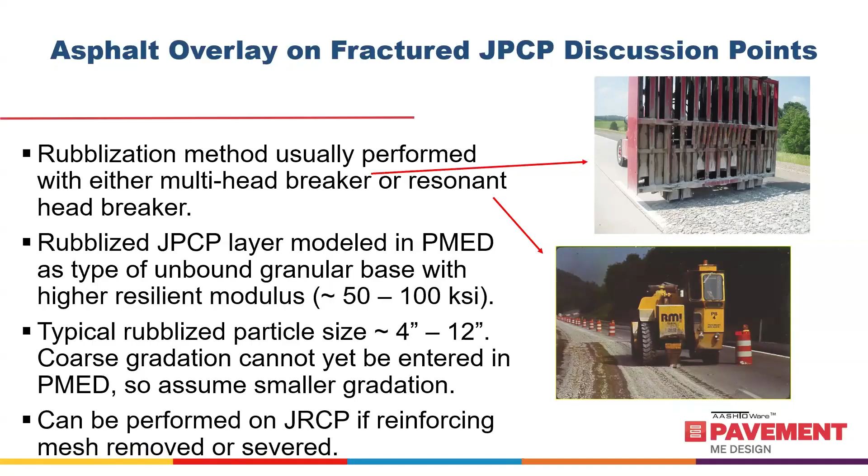So, 2 different strategies here for doing break and seat. You select first overlay, rehabilitation, and AC over JPCP fractured. And if you're rubblizing, then select recycling, and the subtype is going to be AC over rubblized PCC.

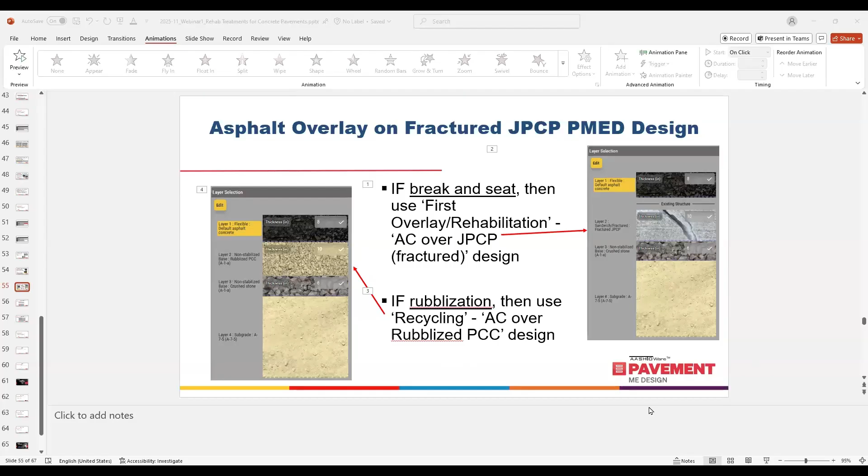For the break and seat method, we need to input whatever the reduced modulus is going to be of the fractured slabs, and also input the transverse cracking and the LTE, which is obviously going to impact the reflection cracking.

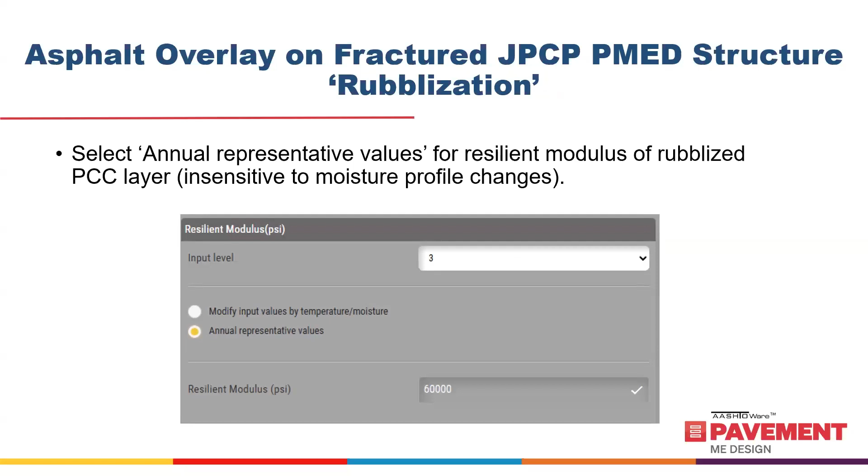Now, for rubblized concrete, for the resilient modulus, you want to make sure you select the annual representative values. That's primarily because a rubblized concrete pavement should be pretty insensitive to changes in moisture, so you don't have to worry about seasonal changes to the resilient modulus.

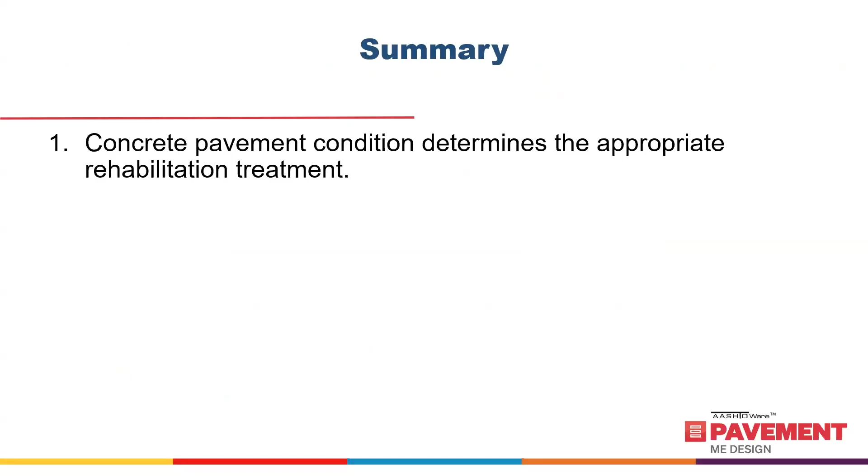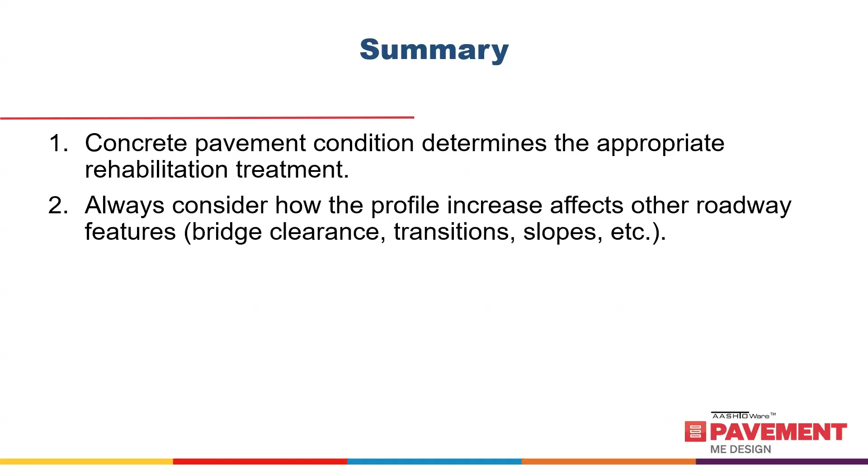Okay, summary takeaways: pavement condition determines the appropriate rehabilitation treatment. And as I hammered home several times, consider how the profile increase affects other roadway features. Material design inputs are essentially the same for rehab as for new design.

Design property inputs should account for any planned restoration treatments. The number of cracked slabs is going to determine what your initial fatigue is going to be, and obviously the degree of load transfer efficiency is going to influence reflective cracks.

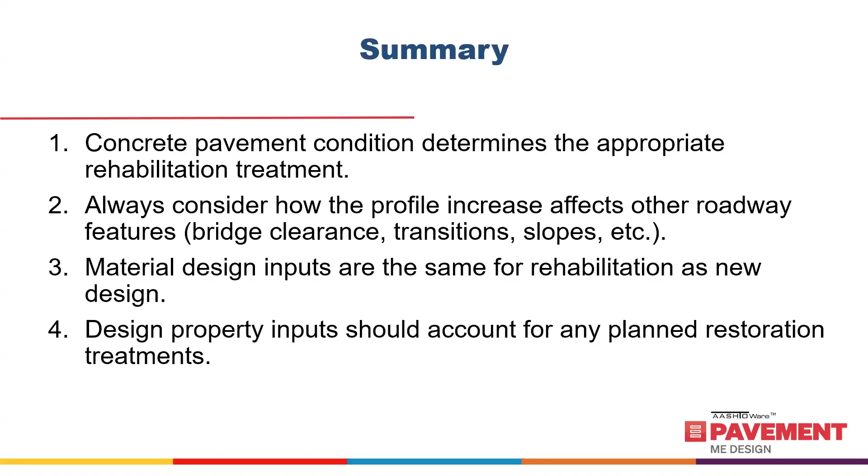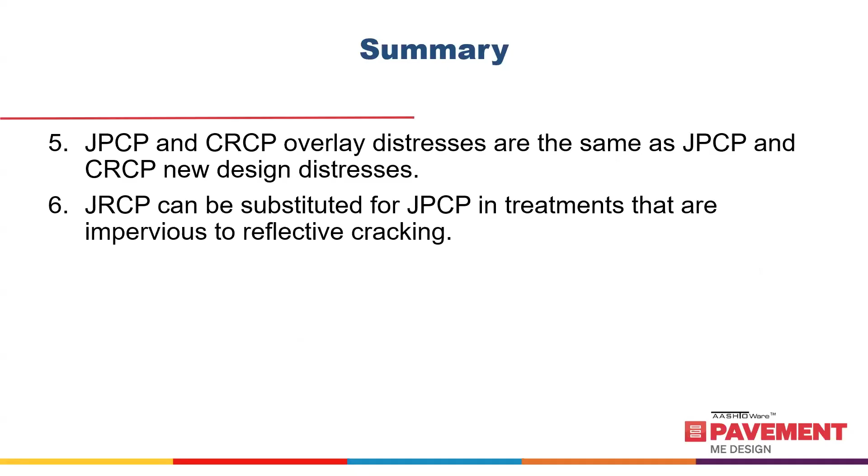The overlay distresses for jointed plain and continuously reinforced concrete are the same as the new design distresses. And I went over the cases where you could substitute jointed reinforced concrete pavement for jointed plain concrete. Some treatments you can do with caution, and there's a couple you really can't.

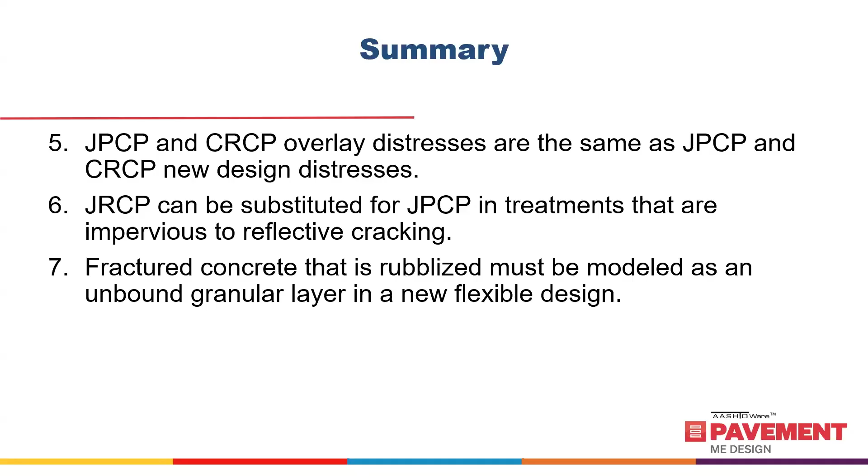Oh shoot, I forgot that. So I said you use the recycling and the rubblized layer option, which you're labeling it correctly by doing that. You could technically also do the rubblization in a new flexible design. I'll update that slide. But you could do it the same way by selecting an unbound granular layer in a new flexible design and just assign it the resilient modulus that you would to a regular rubblized concrete layer.

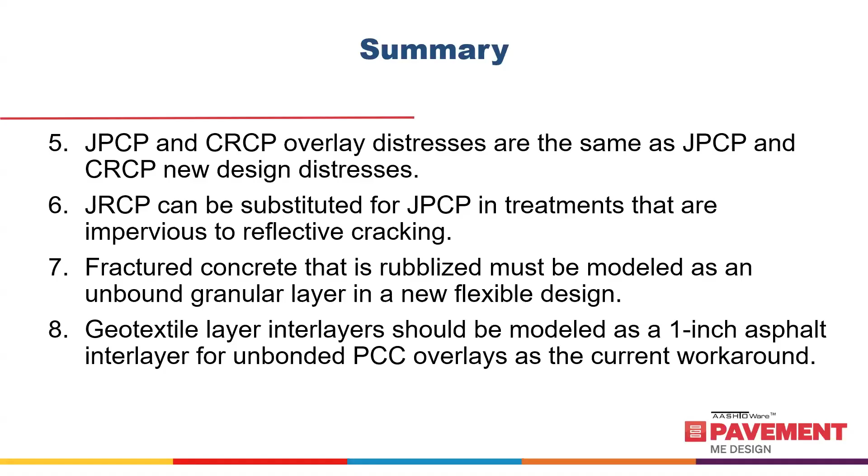Also as a workaround, if you are using geotextile interlayers for unbonded overlays, just select a 1-inch asphalt interlayer in place of it. And that is basically it. So Ben, you want to handle the poll questions?